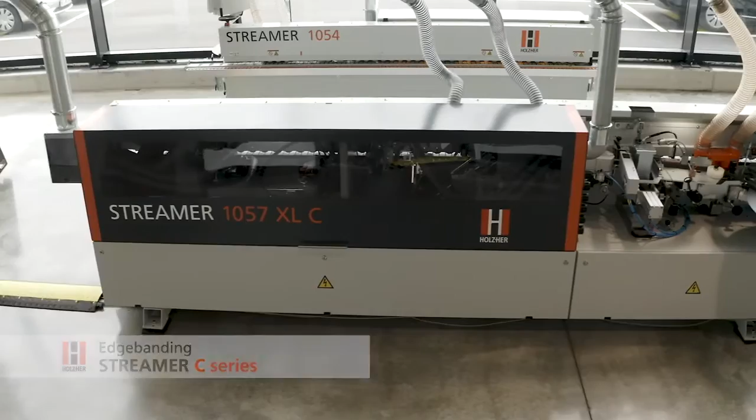High-tech for high-edge quality processing with zero joint as standard. This is the basic idea behind the entire Streamer C series.

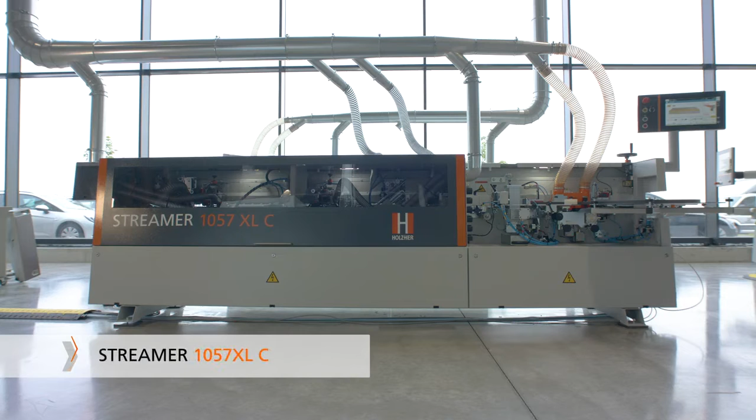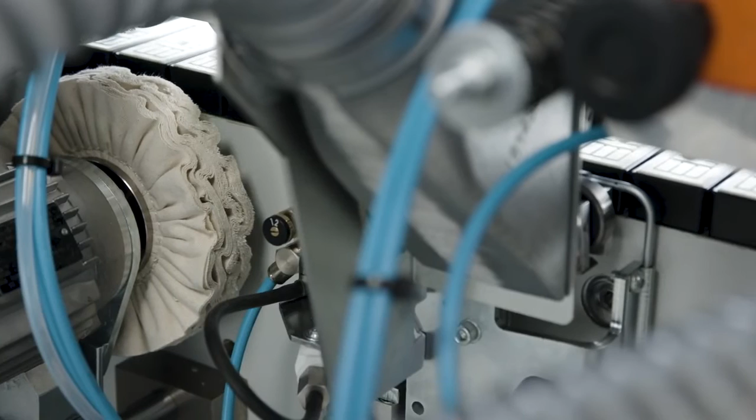With its compact design, the Streamer C series offers everything around a professional edge bander. Two models are available: the Streamer 1054C without corner copying unit, with an overall length of just under 4 meters, and the Streamer 1057XLC with an overall length of just under 5 meters, completely equipped from the joining unit through all necessary machining operations to the finish, with scraper, surface scraper, buffing and spraying equipment.

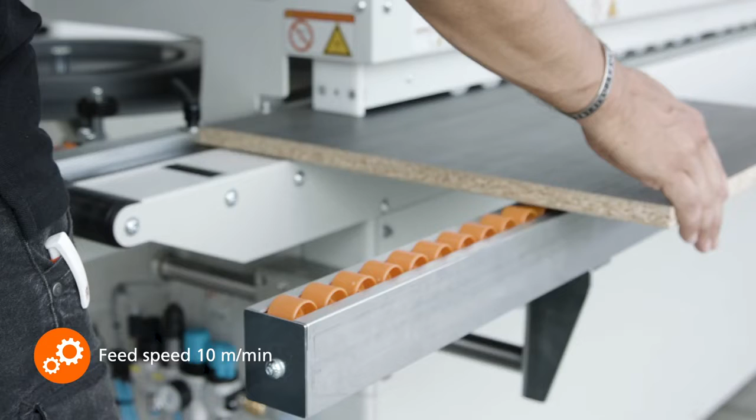With a fixed feed rate of 10 meters per minute, edge thickness from 0.4 to 8 millimeters, as well as panel thicknesses from 8 to 60 millimeters, it covers a wide range of applications.

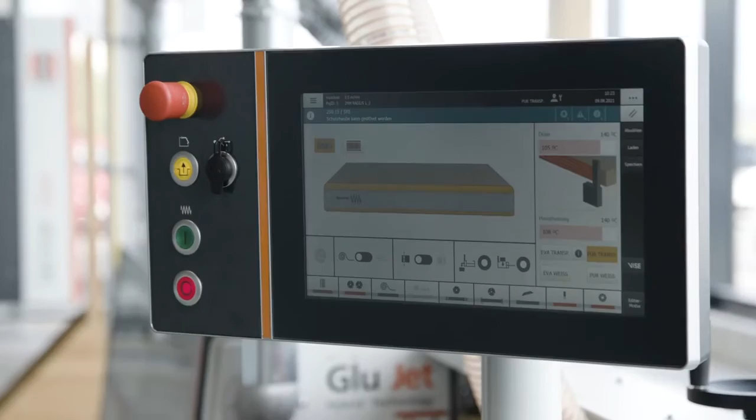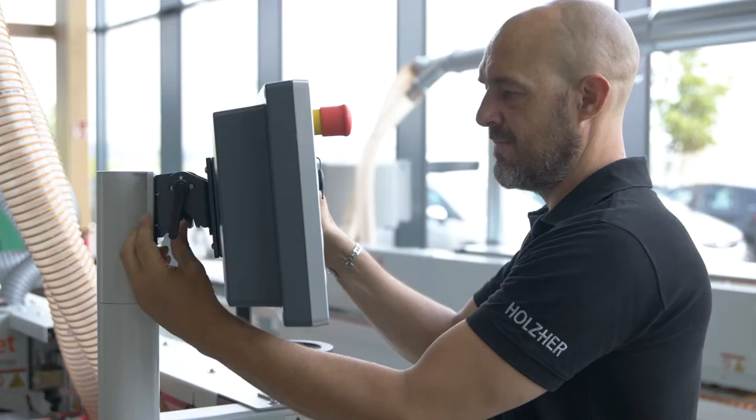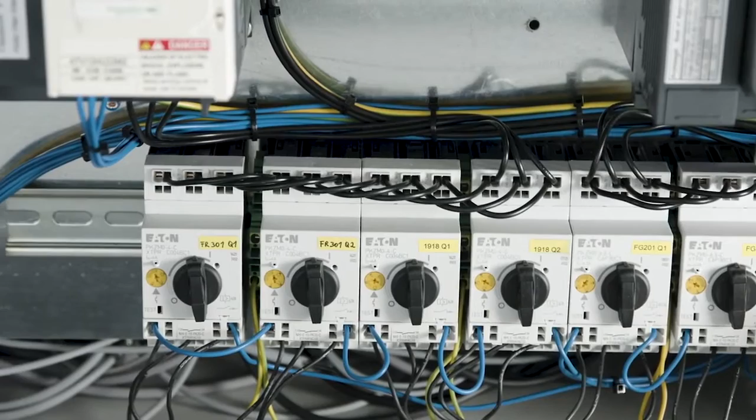The Streamer features a large 15.6-inch touchscreen control panel. Rotatable and tiltable, it allows ergonomic operation in any position. Inside works a state-of-the-art Beckhoff industrial computer, specially optimized for the needs of our edge banding machines, which can be connected to your network, for example for online maintenance.

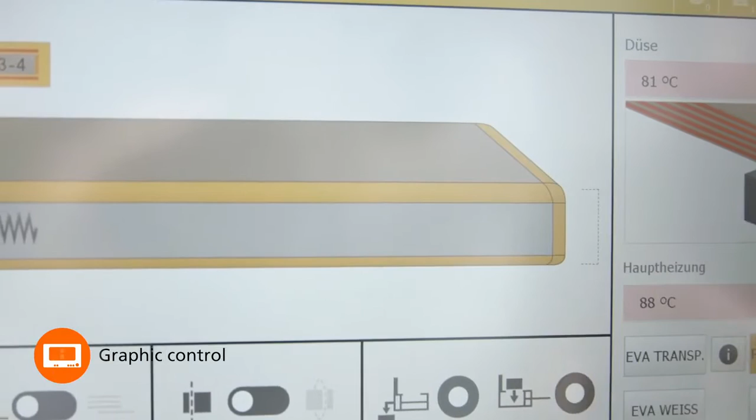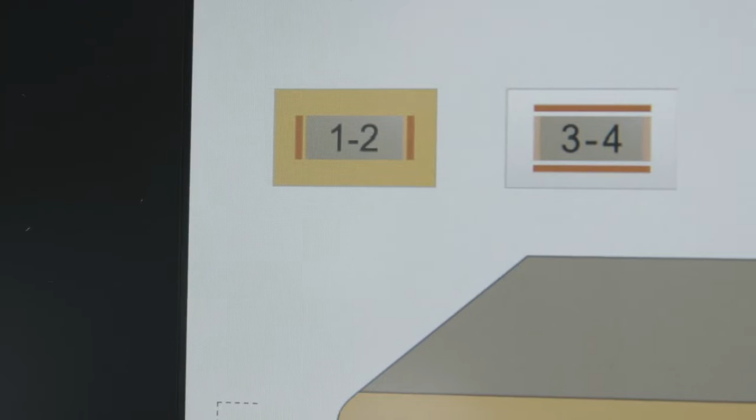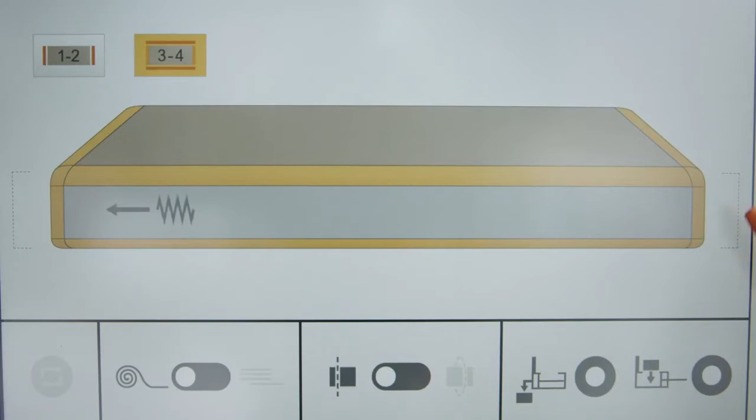The new operating concept for the Streamer C with its graphic control will inspire you with its simplicity and intuitive operation. For example, machining operations can be selected or deselected via the workpiece graphic by simply touching the touchscreen. The 1, 2 and 3, 4 buttons allow quick changeover between longitudinal edge machining 1, 2, or machining with corner copying unit 3, 4 for the 3rd and 4th edge on a workpiece.

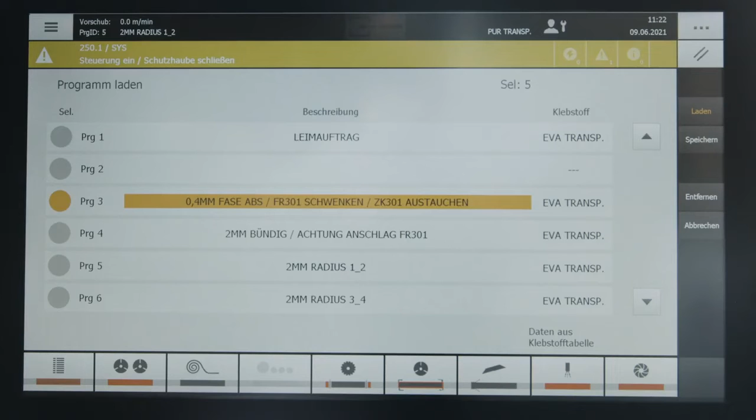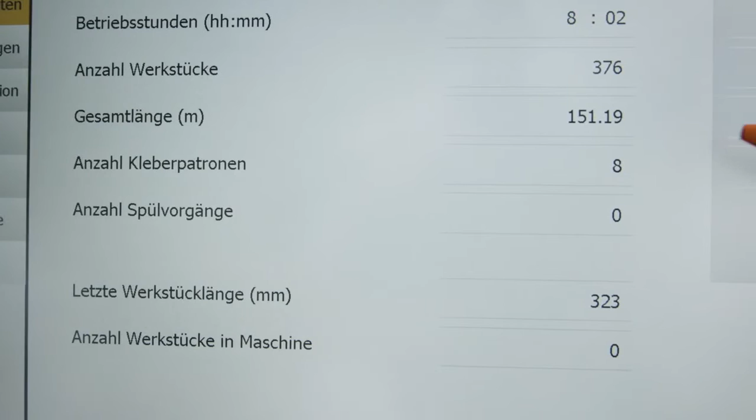An extensive program memory with the complete recording of all operating data, as well as service messages in plain text, are standard. Even the consumption of adhesive cartridges is recorded by the control system. An individual user administration with password protection and individual authorizations can be set up for your needs.

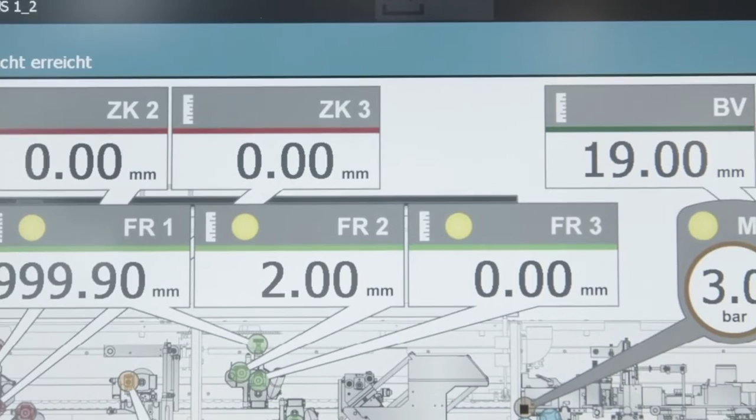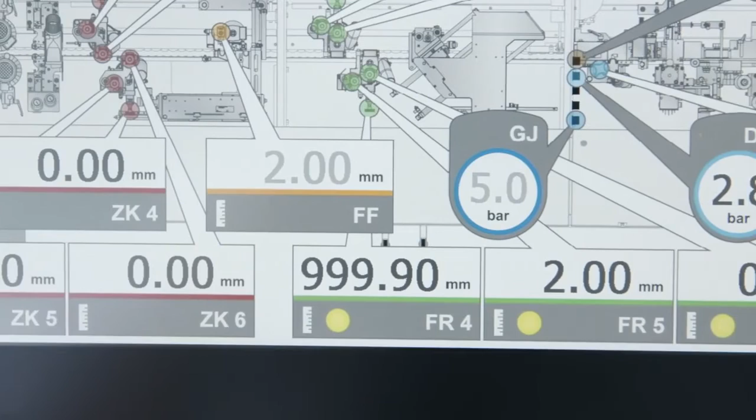VISE stands for Visual Setting and is used for intelligent visual support for the machine operator. VISE provides a digital logbook of all setting values for the digital counters and pressure gauges to set up the machine quickly and safely. In this way, VISE helps you avoid setting errors and reduce test pieces to a minimum. The VISE system is unique in this class, and you will never want to do without it on your Streamer machine.

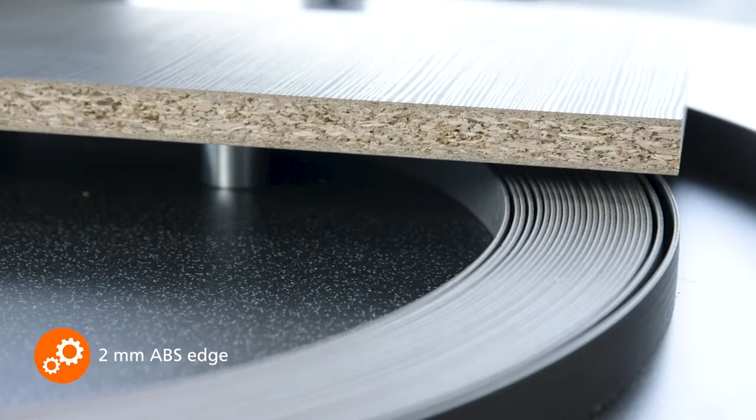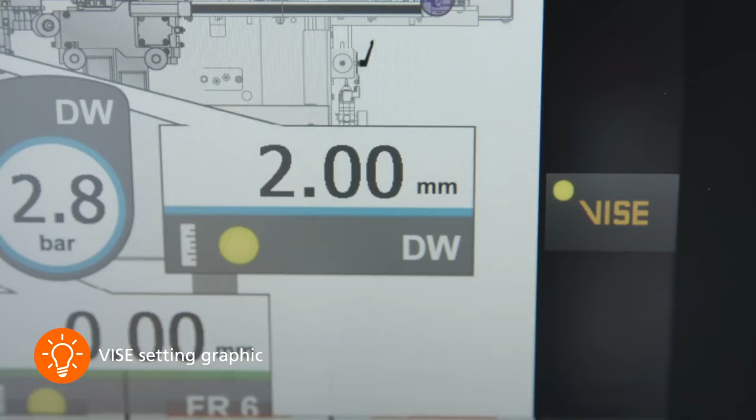Here is an example with a 2 mm plastic edge and complete machining. After program selection, the setting graphic can be loaded via the VISE button. The setting values are very easy to read via the large 15.6-inch touchscreen.

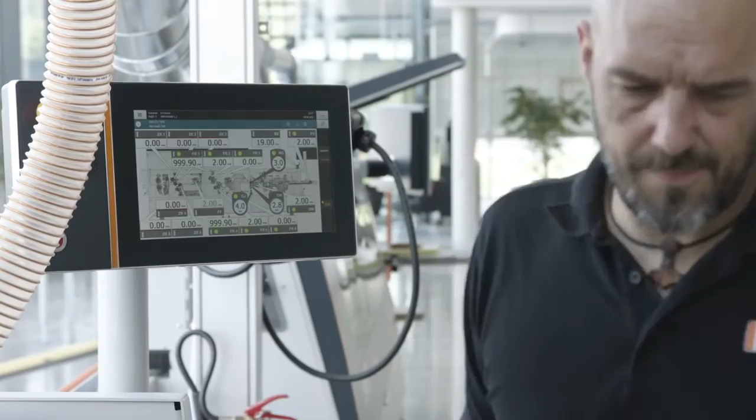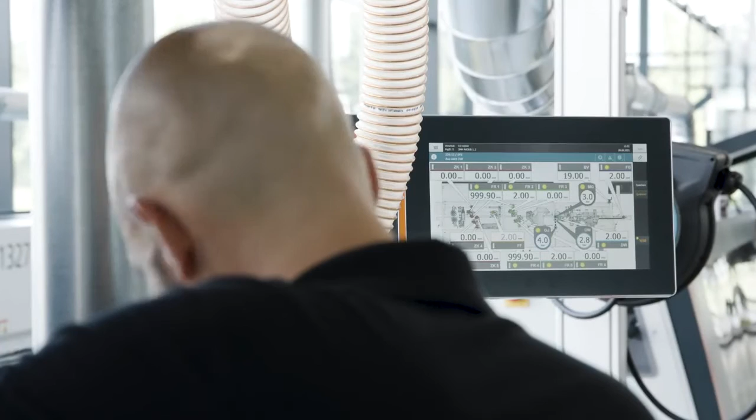Only the values marked in yellow must be adjusted on the machine. Now the individual digital counters and pressure gauges are set to the numbers shown in the graphic and the machine is completely set up. After that, the acknowledgement takes place and the machine releases the machining for production.

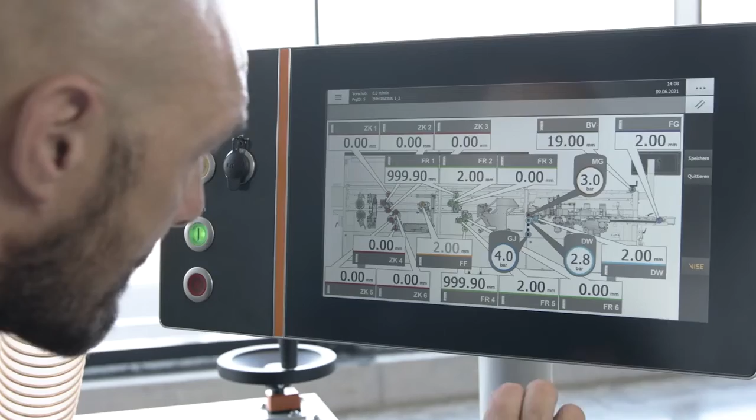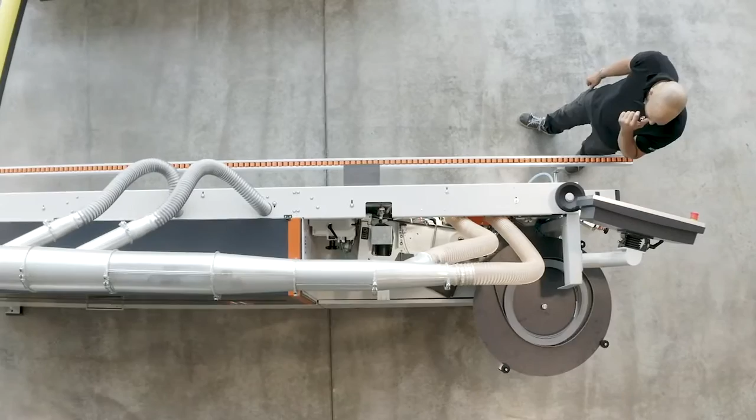There is no easier and more professional way to set up such a complex manual machine. Regardless of the skill and experience of your operators, you will always achieve consistent results of excellent quality.

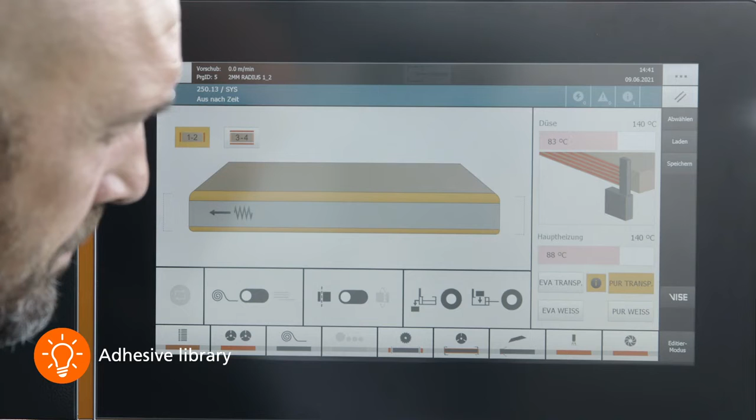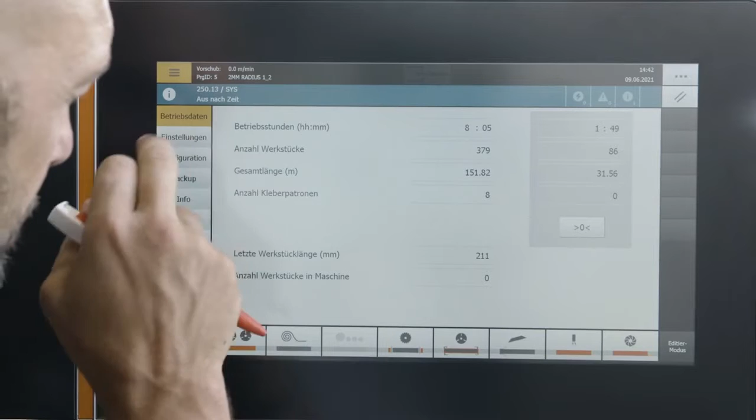Another highlight is the newly developed glue library. With its help, up to 4 different adhesive types with their different properties can be managed. Switching between EVA and PUR adhesives is thus child's play, and all important parameters such as processing temperature, pressure values and also the different adhesive viscosities are taken into account in the respective profile.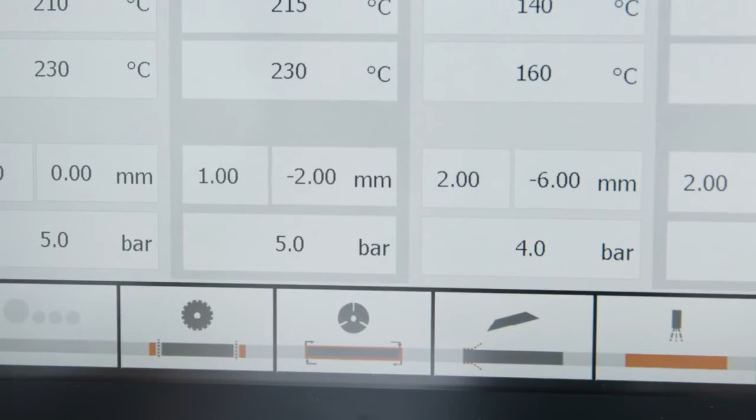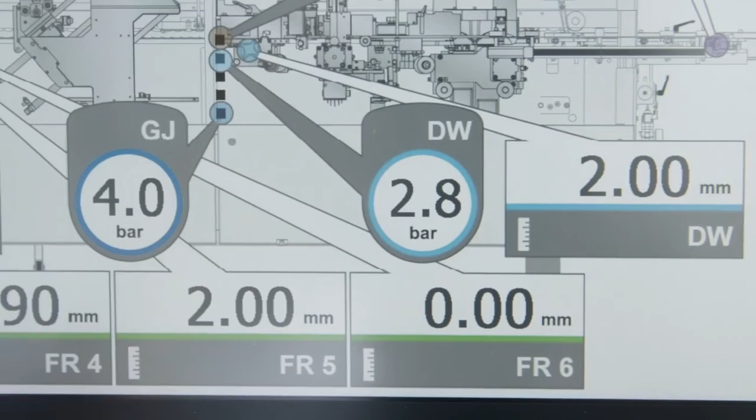The correct pressure value for the GluJet adhesive system, which also controls optimum adhesive quantity, is automatically transferred to the VISE system depending on the adhesive type. The on and off points of the draw frame control are also optimally adjusted depending on the adhesive viscosity.

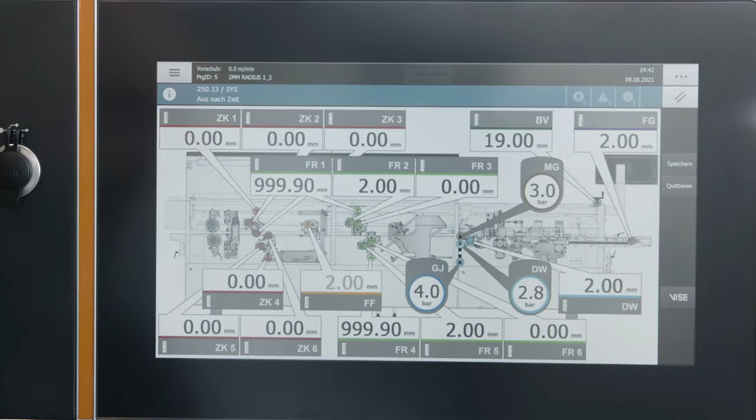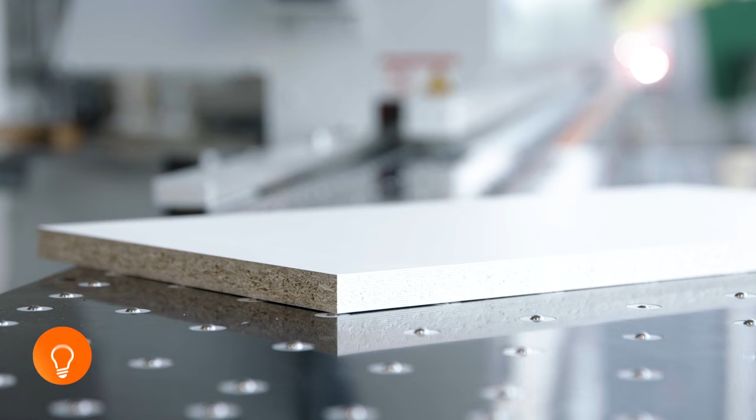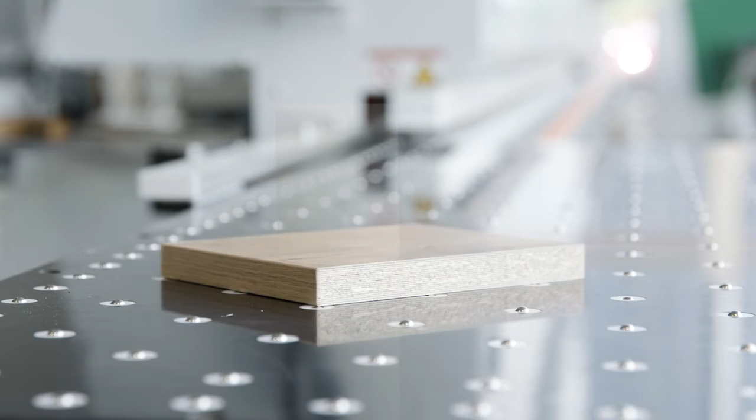This means that all important adhesive types are available at all times, with optimum setting values depending on the application: white EVA adhesive for your cost-effective light decors, white PUR adhesive for your waterproof light-coloured furniture, neutral EVA adhesive for darker decors, and finally transparent PUR adhesive, for example for dark textured panels. No more compromise for your quality, and all with zero joint.

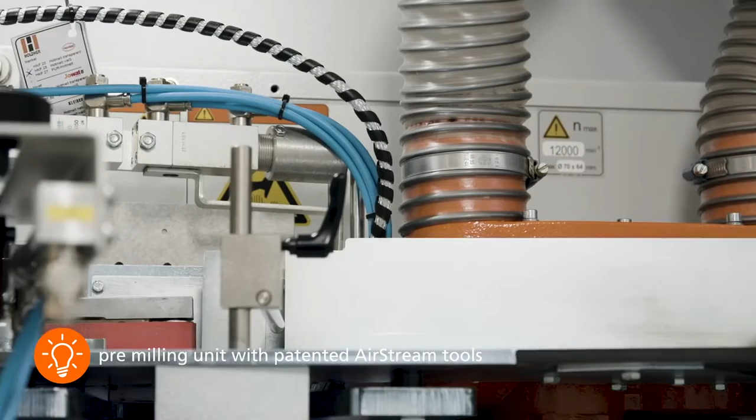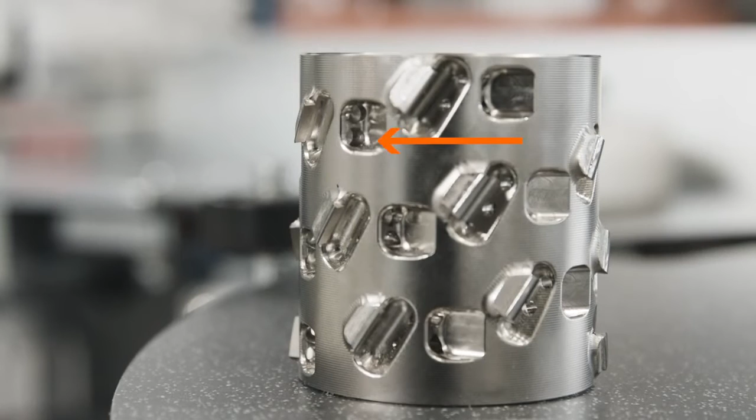With the two patented Airstream jointing cutters, the jointing unit ensures a perfect adhesive surface without tears in the top layer. The integrated drill holes in combination with the optimized suction hood ensure optimum chip removal. Up to 99% of the chips produced are collected directly by the extraction system.

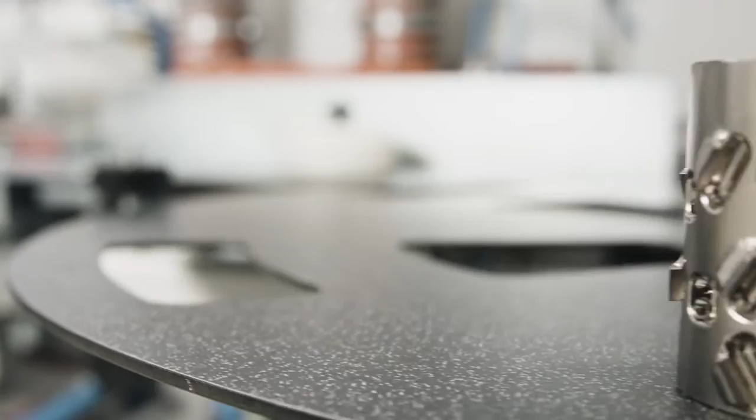This effectively prevents double chip removal and ensures an enormous tool life of the milling cutters. Furthermore, these cutters are also extremely quiet and can be resharpened up to 4 times.

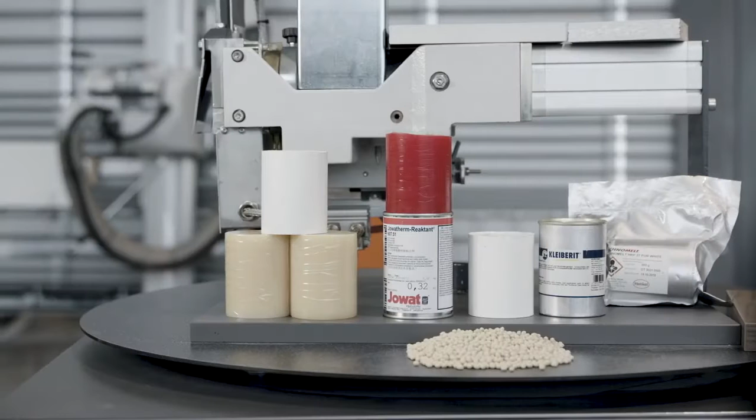The heart of the streamer is, of course, our unique GluJet adhesive application system. With GluJet, you can process standard adhesive cartridges or granulated adhesive as standard, with EVA or waterproof polyurethane adhesives as required, in an unrivaled quality with zero joint.

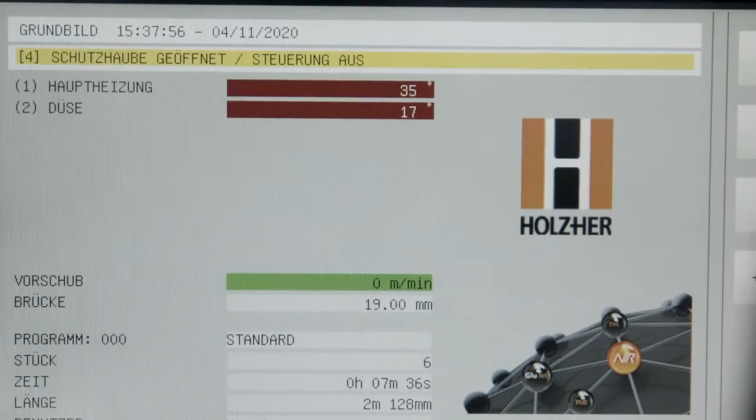The machine is ready for operation in just 3 minutes and cools down just as quickly. With its short heat-up time and low energy consumption, the streamer is a pioneer in energy efficiency.

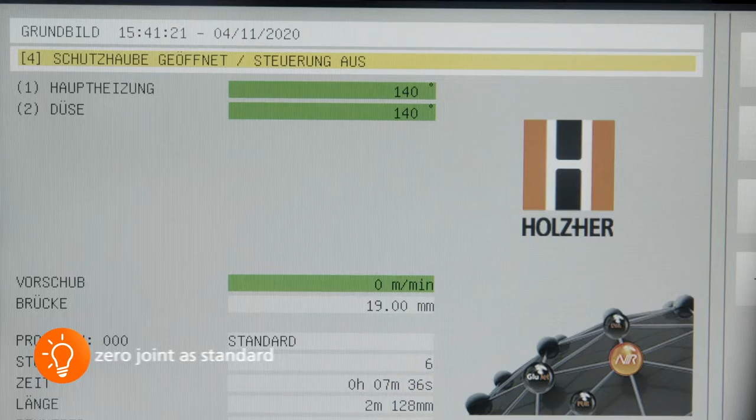With GluJet, the adhesive is pressed into the plate structure under high pressure. Thanks to the 90-degree doctor blade division in a 1mm grid, for example on a 19mm plate, 19 adhesive strips are applied with high precision.

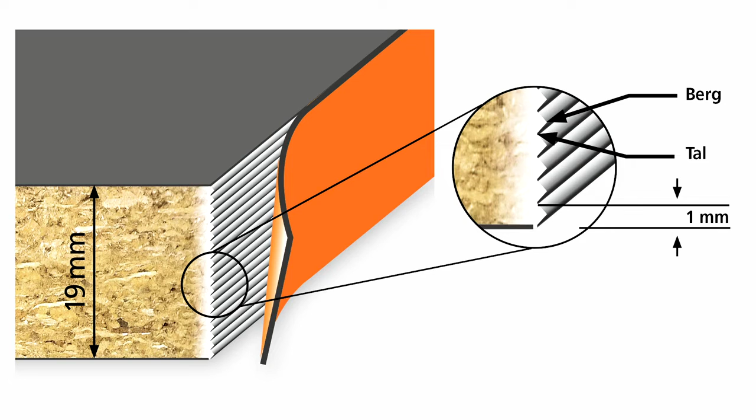During subsequent pressing at the pressure unit, the adhesive can now spread from the mountain to the valley within the narrow surface without swelling at the top and bottom, thus creating a clean optical zero joint. At the same time, this patented process ensures a high-strength joint.

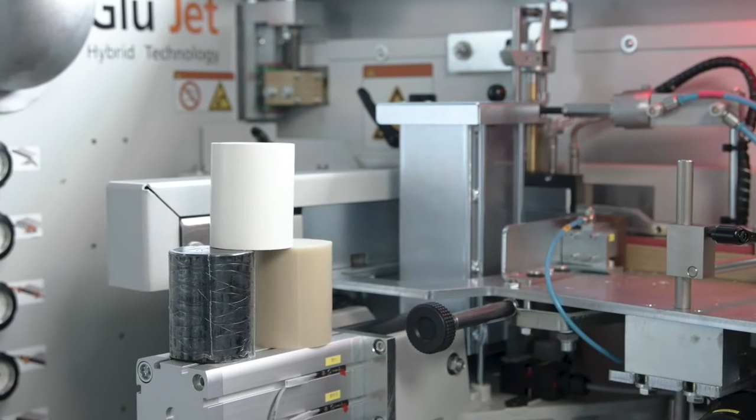With GluJet, adhesive changeover is simple, fast and clean. Thus PUR adhesives, EVA adhesives or various coloured adhesives can be changed within a few minutes depending on the application.

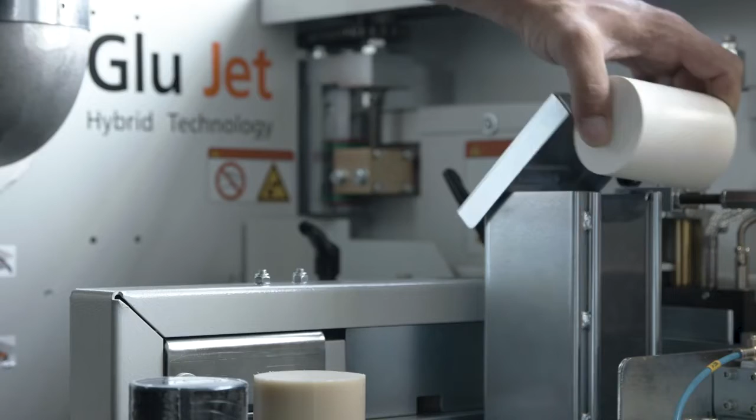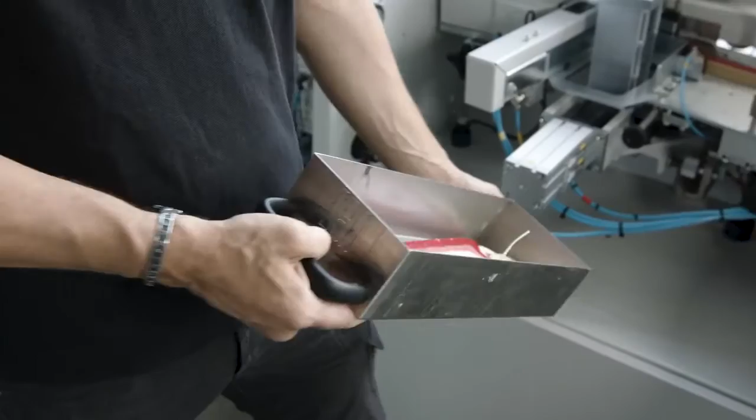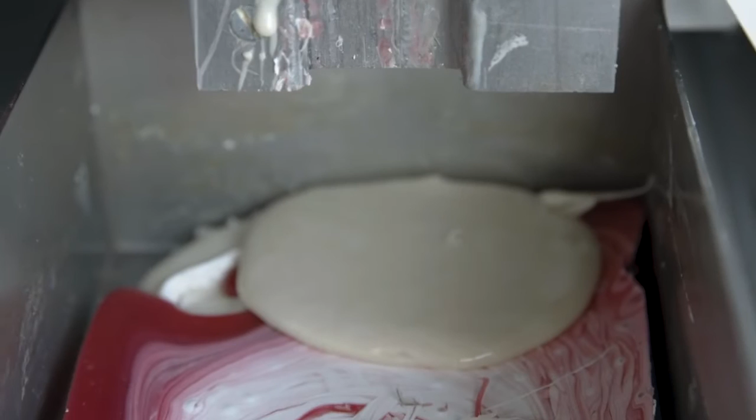Residual amounts in the adhesive system are simply rinsed out into the GluJet collection container provided for this purpose. The rinsing process takes place via the rinsing hole integrated in the GluJet. The new adhesive is then poured in and rinsed further until the new adhesive has displaced the previous adhesive.

The whole process works when changing from PUR to EVA or vice versa. This way, you always have the right adhesive for your perfect results.

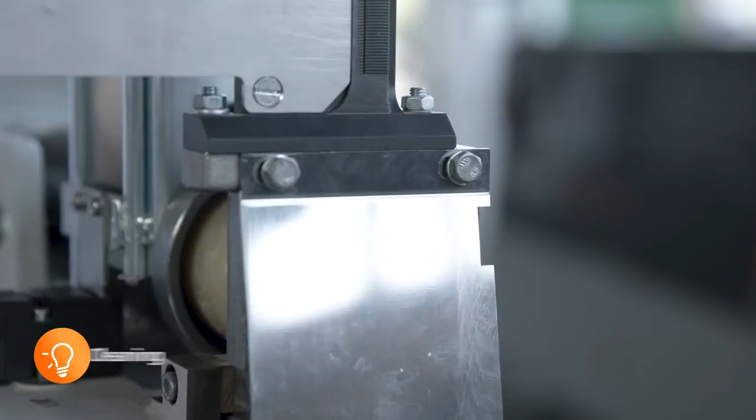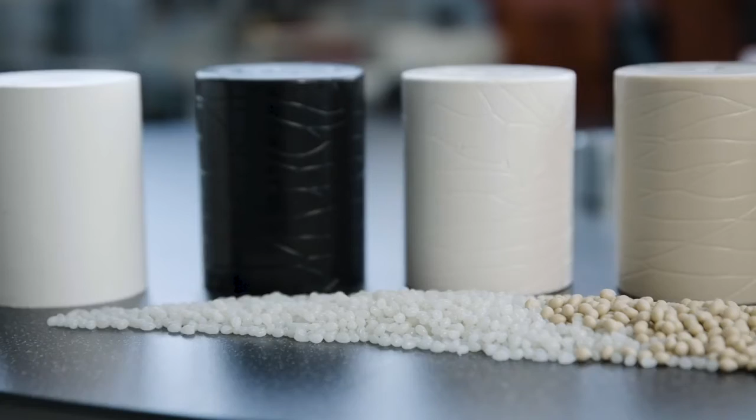Cleaning the system is child's play and takes only a few moments. When using EVA adhesives, the adhesive can remain in the system and only the adhesive application nozzle needs to be cleaned.

The machine bridge is moved to the maximum height so that the GluJet nozzle is completely open and accessible.

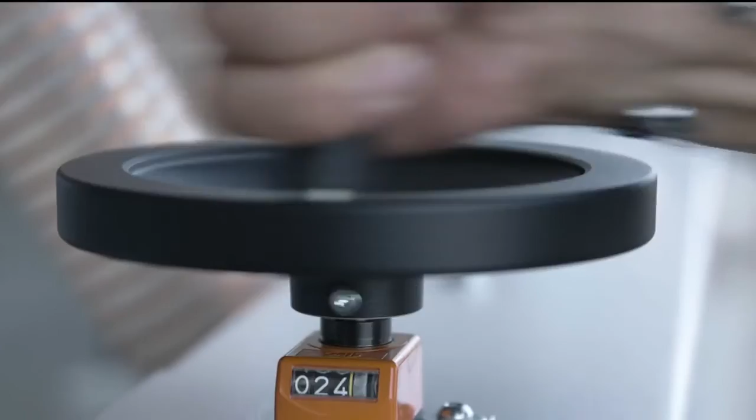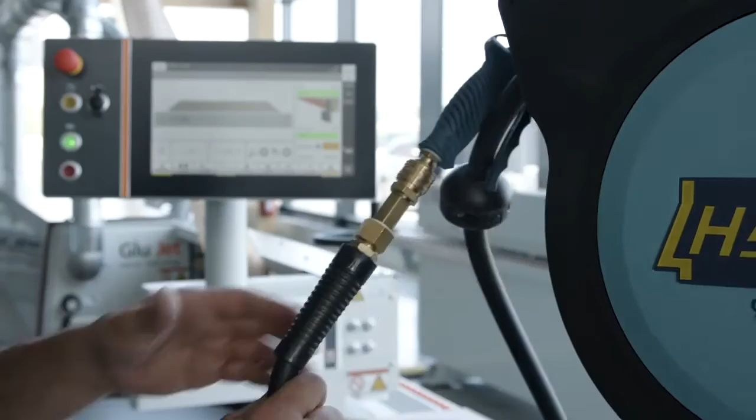Adhesive residue is then loosened using a compressed air gun, and then the specially hardened nozzle is cleaned with a wire brush. Tip-top clean in just 1 minute.

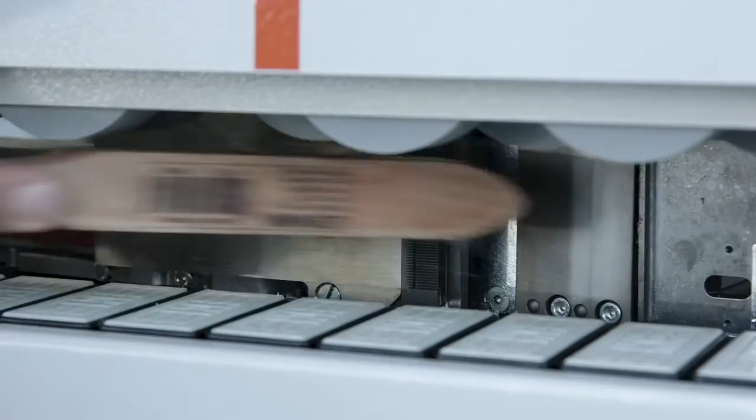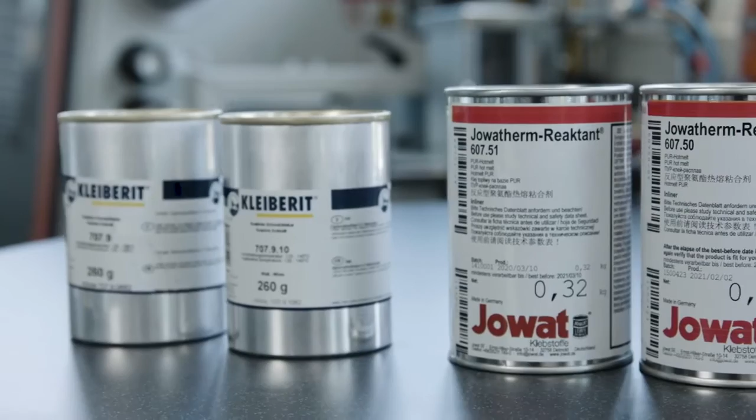PUR adhesive can then remain in the adhesive station for up to 48 hours. After that, usually before the weekend, the complete system must be flushed and neutralized with the correct pressure, temperature and amount of cleaner. Special PUR cleaners are used to flush out the PUR and prevent further reaction of the PUR adhesive.

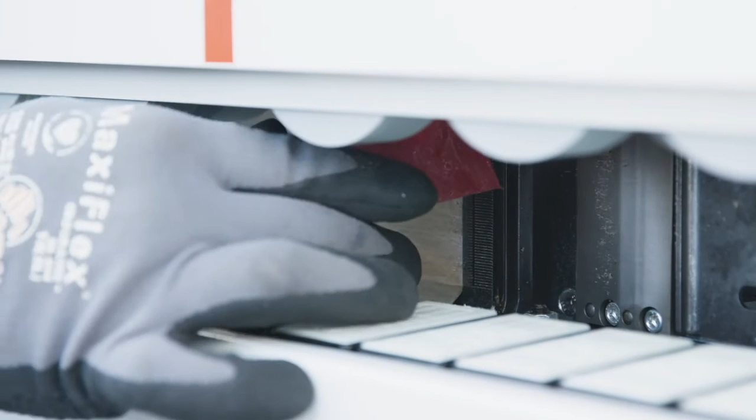Afterwards, the nozzle is cleaned again as with the EVA adhesive, except that the nozzle is additionally sealed with PUR neutralizer. And again, everything is tip-top clean.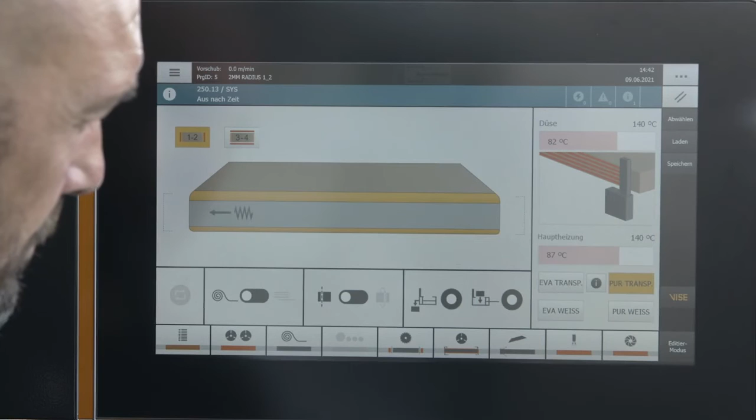Whether for thin edges, all common plastic edges, or solid wood edges, with the streamer you are always on the right side for a perfect result. The Glu Jet system makes you highly flexible, and you can always respond to your customers' wishes individually while remaining profitable. The make-ready support with VISE and the unique glue library support you in an unprecedented way.

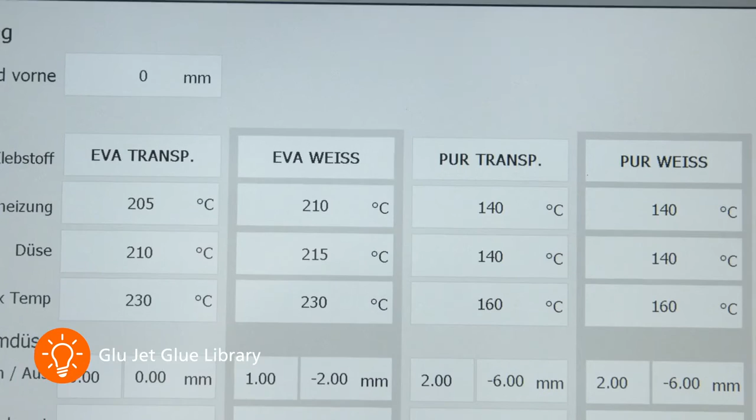The Edge Bander is critical to the high-quality look of your furniture. Don't live with compromises or encrusted adhesive melting pools any longer. Bring clean, efficient and affordable edge banding technology of the highest quality into your home with the Streamer.